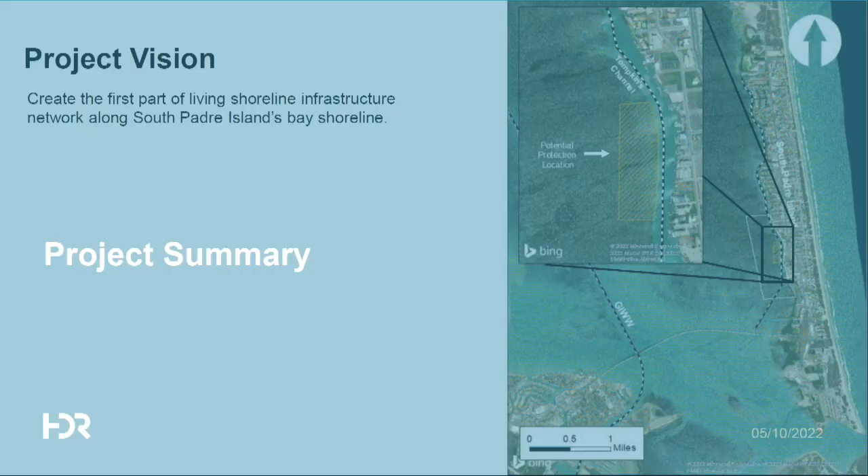So we're just going to skim through what they talked about last time. If y'all have any questions or ideas to brainstorm, feel free to stop me. So here are the things we are looking at. Bunch of data, very exciting. Okay, so one of the first options they gave were these reef systems, all the way from reef makers, which sit so high above the water line. They do not transpose up and down. They are solid. They sit wherever they are set at.

You've got a full breakwater, and then you've got the reef balls, and these are the most minimum impact. Obviously not the breakwater, but the reef systems will give you the smallest amount of seagrass impact just because of their footprint. Here's a little mock-up of what they would look like, submerged, placed in the water, kind of the groin-looking encompassing area. You got boater inlet. That's kind of the first idea or design for you.

Can I ask a question? Of course. I don't know if this was before I got on the committee, but what is the reason to put this in this location? Has there been some shoreline loss, or why are we doing this? So the idea is to actually run it the entire length of the Tompkins Channel to give bayside protection. All we have is riprap or bulkheads that are actually washing away underneath themselves at the moment. So you either have to backfill or continuously build them down deeper, but you just come to these never-ending vortices that eat out underneath and wash out.

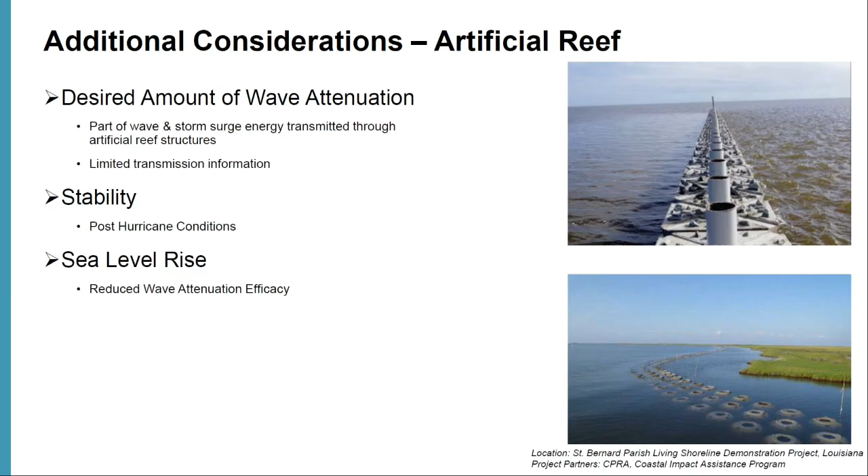All right, so let's go ahead, move on. So we've got that one. More info on that. Next one, intertidal berm placement. The idea goes from oyster shell hash that would be placed, and then you can berm and plant on top of that, all the way to sand and clay berms. Very more marsh-like setting. These wouldn't be bracketed in. The later designs have brackets that hold the berms in place. They're just meant to be like a gray-green mix. This is just pure green, I would say, in layman's terms.

So this is what you'd be looking at there, a series of interchanging berms. You still have boater inlets, same kind of thing, but you've got a max elevation of 1 foot, give or take, in certain areas on these little islands that would be deposited. And it would look like this to start with, but it would slope itself out over time and wouldn't be that wide.

And then we've got kind of living breakwater or containment cells, which are these. This is just the front end protected. This would give you kind of a riprap or fill material in the front, and then give you the marshland behind it. Same thing, except now you've got a double barrier, so it's kind of a more set-in structure. And those are really it.

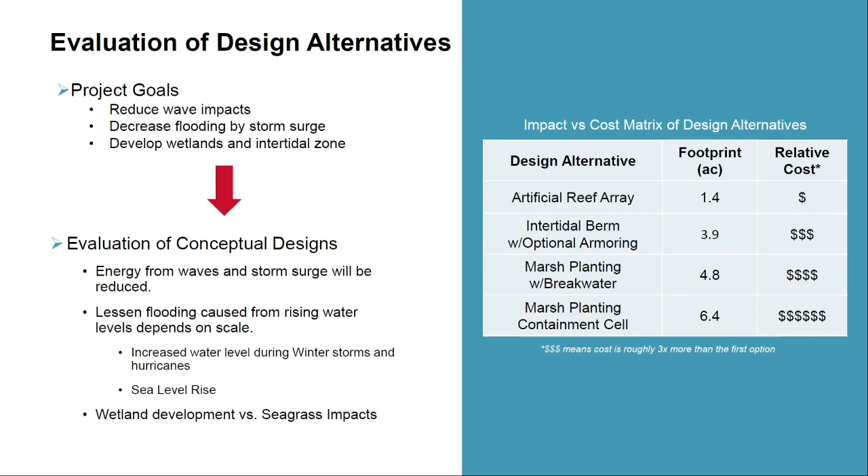And we would look at implementing this shoreline segmented. It would be phased. It would not be all done at once. So it would have to be something that would be grant funded and readily available. But that's something we're going to look at in 2 to 5 years, because we would have to have full funding, full permitting and design first. For the whole Tompkins or just the section that we're looking at now? We would probably design the section we're looking at now, first priority, so we can start going out for funding initially, but design the whole thing and do full permitting and get funding as we step up.

Do we have a sand source? It could be clay material from Tompkins. It doesn't have to be sand necessarily. Sediment in the area. I mean, I'm just thinking, our list is off our last meeting. And this is just me talking out loud. My primary preferred thing would be intertidal berm, just because it's not the most natural, but it's the most soft thing we could possibly do, right?

And then I would go with the one-sided containment cell. We also talked about a full containment cell, but it wasn't on the slideshow right now. But my issue is on both of them. So if we just had the intertidal berm, that would be basically a spoil bank in front of the channel, right? If we had the one-sided containment cell, we would have a hardened structure on one side and then soft material on the other side, like clay or sand or whatever it is.

Okay, so this is the double containment cell, but this is the single. So Rob's right, you'd have a breakwater sort of on your eastern boundary, and then you'd have fill on your western boundary. Or, excuse me, vice versa. And then with your intertidal berm, this is what you're looking at here. Can we go back a little bit? I'm not following you. So your breakwater is the gray triangular structure sticking up? Yes, sir. Okay. And behind it is? Would be fill, sediment, clay, dirt. Yes.

It was to mitigate wave energy impact, and it also gives you a mitigation area for any damages to seagrass and planting, so you can still have habitat and ecosystem behind it. How much does it stick up above sea level? So the top of it is 3.5 feet from the base of sea level. And so it sticks up 2 feet, I think, from the drawing, from the upland marsh line. So maybe 1.5 feet. And this is the one that Rob had the question about the erosion that could potentially happen there?

It's set how far off from the channel? How far west? We're going to figure that out later. Great question, I'm going to write it down. I'm just asking a question. That's good, I'd like to know what you think now. I do not know personally. Well, that's fine too. Are we talking about 10 feet, 20 feet? I mean, an idea?

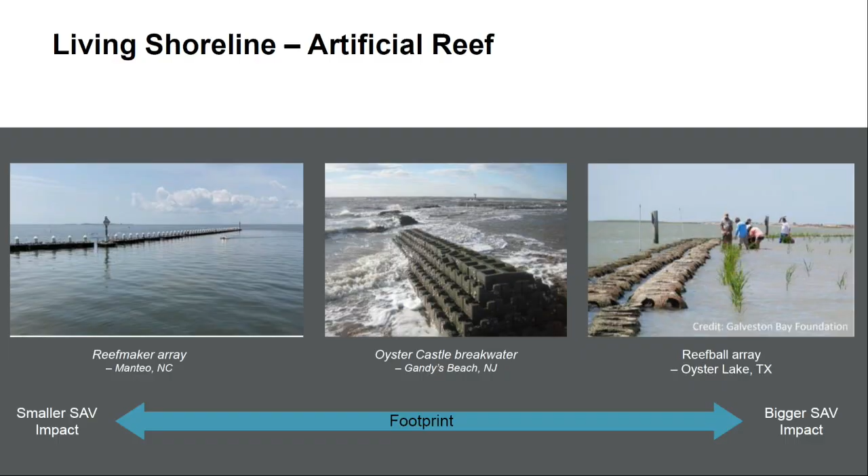So do you like that or you don't like it? We definitely can do whatever you all would like. I think a living shoreline is more appropriate for what we are looking for, but it really truly is up to you all. So I agree. So my question was, do you like that or do you not like that? Those are great, but we're really trying to go for more green infrastructure and really incorporate a living shoreline that's not only beneficial towards preventing wave attenuation or reducing the erosion, but creating habitat along our bayside as well. So that would not be the option we would pick, it would be our fourth.

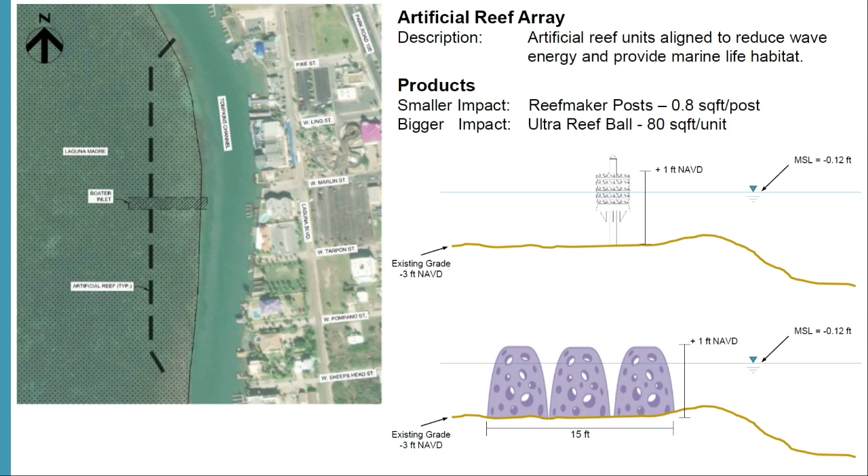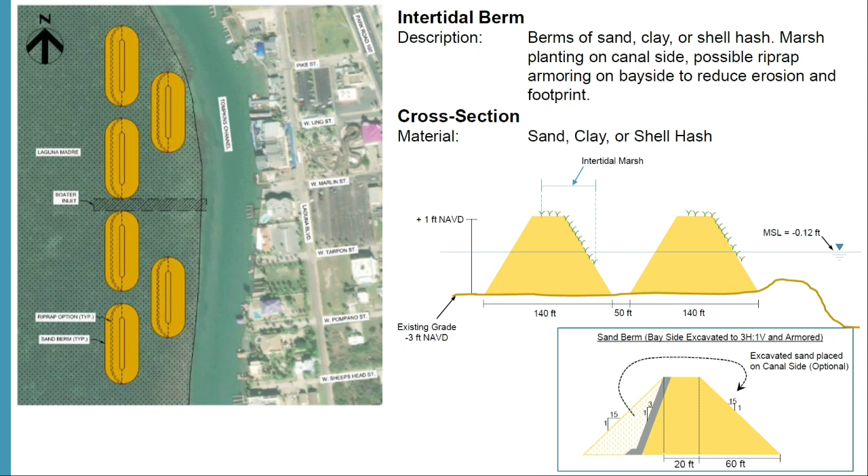What I've read and been in presentations for on reef balls, they're great for offshore stuff, for creating habitat, but they're not very good at breakwater stuff, is what I'm getting. And since our bay, especially at that point, is less than 4 feet deep on high tide, maybe 5 feet deep, they'd be sticking out and I don't know. If you had the intertidal berms, then you'd have a berm, which is essentially a spoil bank with vegetation on it. It looks nice, both sides.

If you have the one-sided cell, then on one side, if you're out there on the water looking back at the island, you're going to have a concrete wall. On the back side, looking out towards the bay, you're going to have a greener, more aesthetically looking thing. But my question with that is, what happens if we start creating currents back here and we start eroding away some of that area? But the intertidal berm that was shown there, would that one have vegetation on all sides? Yes, that one would be the most aesthetically pleasing, I think, it would look the most natural. Obviously it's not the most natural, natural, but in my opinion, anyway.

Christina brought up a good point, but we are going to have full modeling of whatever designs we do pick, so you'll be able to see the sediment either washing out or how it performs in different wave action categories. That's all going to be coming up in the next phases of design. Well, then I think I would also like to see the intertidal berm and the one-sided living shoreline, see some more information on those two.

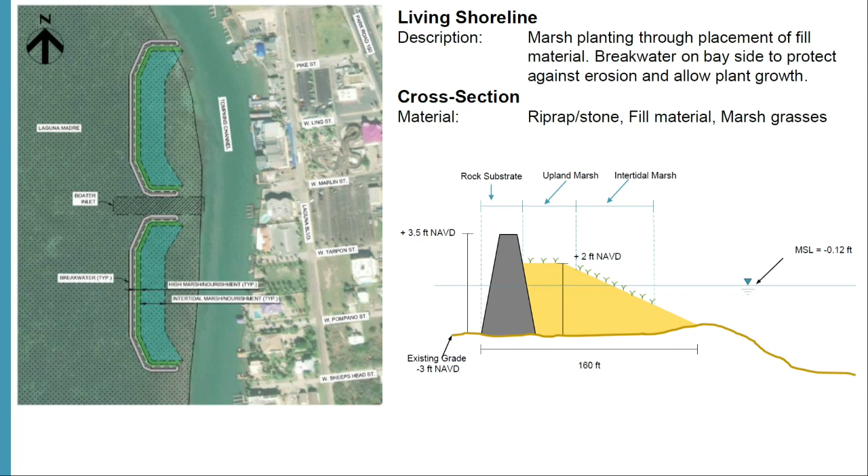Is this intertidal berm strictly oyster shells? It can be any material. So here you go, here are your two examples up on your screen. So it can be just an oyster breakwater. We have seen them do things like this, especially up towards Rockport and Corpus, where it does capture sediment over time and plants do grow on it. Or it can be completely a clay berm, like over on Dollar Bay on the right-hand side. It can be any material, really, that's approved.

Where is that Dollar Bay? In Texas, I'm not 100% sure where it is. It's up near Bay City.

I actually think they put these berms in because they were losing a lot of wetland and marshland habitat. You can kind of see the erosion on their bay side in that photo, and they're protecting the channel or levee that's running behind it.

And the road. Do you know if it was effective for them? Did it work? Most intertidal berm projects we've seen have had pretty high success rates. It is successful.

Why doesn't the sand get washed away? I think, just like our dunes, they redeposit themselves, naturally catching, even after a storm surge. Once there's a structure there, it has something to adhere to.

Well, on the left you have oyster shells, which I wouldn't go with, but that's not going to get eroded away very quickly, and clay does not erode as fast as sand does. So we would have to look at the material, and I think that's for the engineers to come back and tell us what the best materials are to make this project last as long as possible.

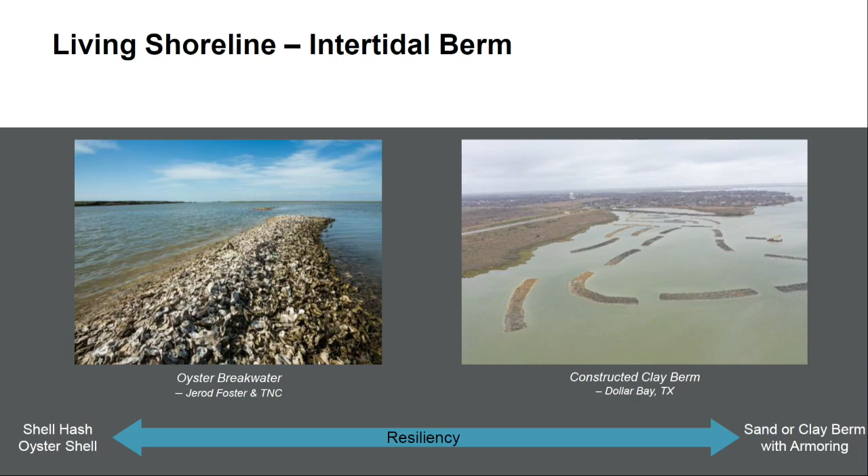All right, 4.3, updates on department projects. Coastal Management Program, CMP Cycle 24, CMP Cycle 25, CMP Cycle 26, Marisol Boat Ramp, Restore Act, and Texas Parks and Wildlife Department grants, Wind and Water Sports Venue, Tompkins Channel, Regional Sediment Management Plan, the entire smorgasbord.

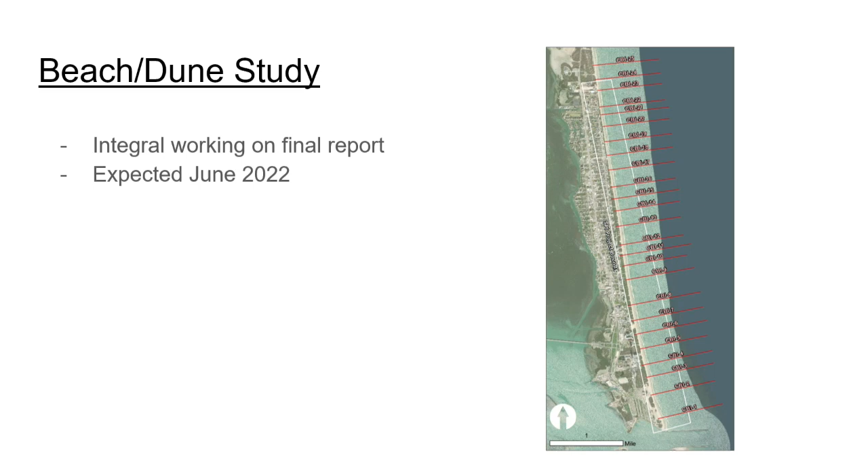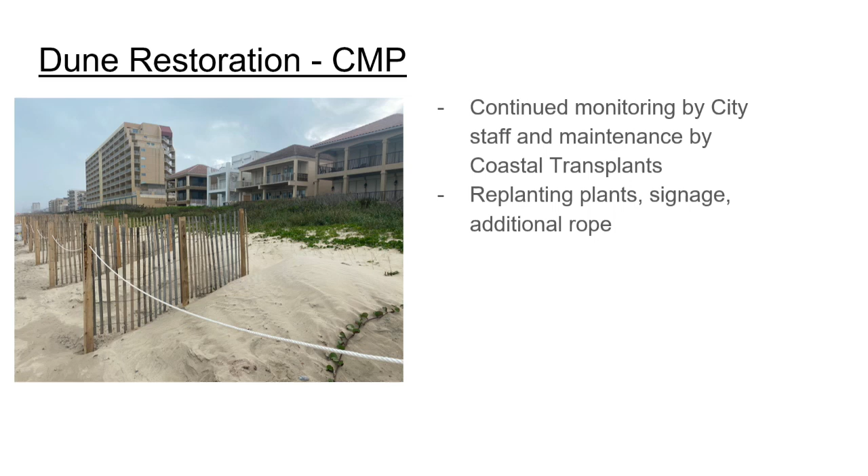Our next one is our Dune Restoration project, which we are so excited about. It has done so well. Right now we're monitoring it, constantly out there checking on it, and Coastal Transplants is still performing maintenance on the project, replanting plants if needed. We're working on installing signage, and in the past couple months we saw a lot of people getting under the single rope that was there, so we added a double layer of rope to prevent people from going into the dunes, which is great.

After 2020, when we had all those storms come in, Inverness had no dunes at all. So this is all completely grown back, which is great. A lot of years they were living like that. I guess this rain we've had really helps out. Yes, that's helped too.

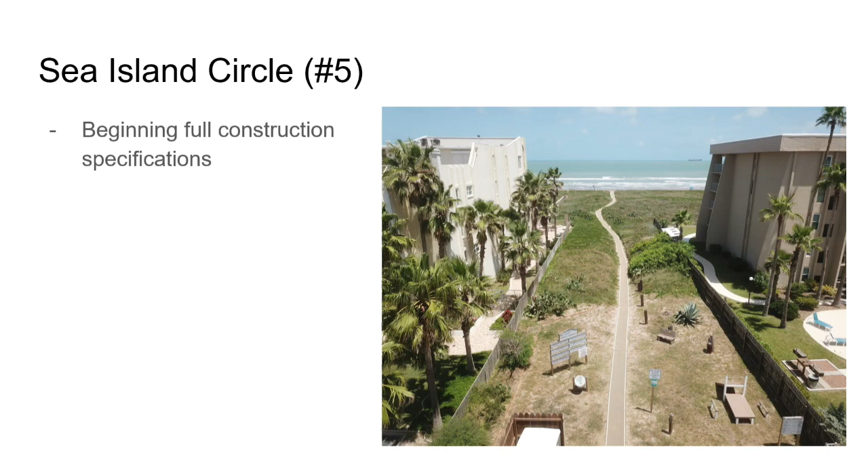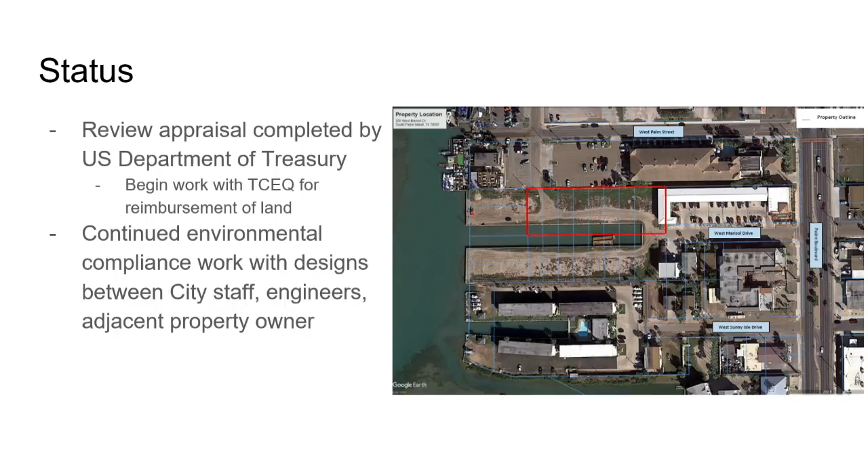For restore, as of last week the Treasury finally finished their review appraisal, so we've been working with the TCEQ for reimbursement on land. We're also, through a Texas Parks and Wildlife grant, working on the design for this boat ramp. Right now we're working through the designs between staff, engineers, and adjacent property owners to make sure this is moving forward. Same thing, but Texas Parks.

For the Wind and Water Sport Park, we're still working through the Corps process. I gave a very detailed update at the 4/20 City Council meeting, documenting everything we've been through up to this point. We're still working through that process and will actually talk about it tomorrow at council. There's going to be additional work related to our biological assessment and our 404 permit with the Corps, so we'll discuss that tomorrow. We're still trucking along with that one too.

Does that seem pretty likely? We're getting there. Did you get past the objections with the Corps, I guess? We're still working with them.

For Tompkins Channel, HDR got the Army Corps permit at the end of April, and now HDR is working on dredging documents, surveys, geotech work, that sort of thing. So that one's also moving along.

The Regional Sediment Management Plan has been going on in the background. The Corps has been doing a lot of modeling and different work. We worked with the Corps and Cameron County through their Planning Assistance to States program. They gave us a presentation last week on what they've been doing so far and what they've found, which was super interesting. They'll actually be giving a presentation at the city council meeting on the second meeting in June, the 22nd, virtually. I highly suggest coming or tuning in to watch, because that presentation is very nice, a great presentation. Highly recommend.

And that's our project update. Thank you very much. Any comments or questions about any of this stuff, guys?

Girls? Ladies? Men? All right, then we move on to number 5, adjourn. Awesome, thanks guys. Guys on one side, girls on the other. Okay, let me send you my little pics.